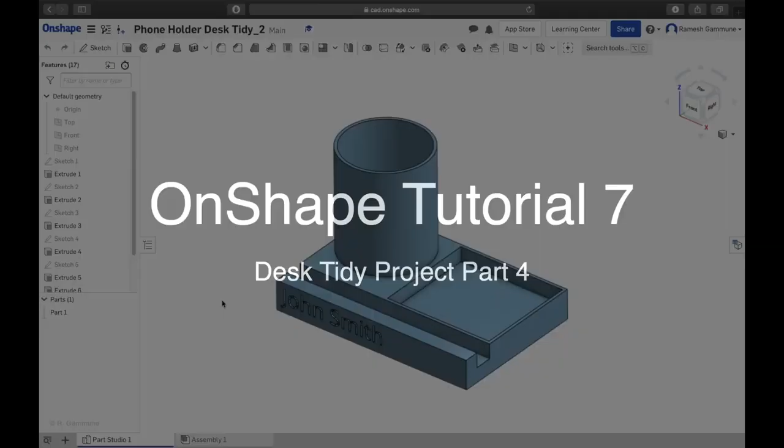Hey guys, welcome to the last video of our Introduction to Onshape tutorial series and the last video of the desk tidy as well. Today we are going to export this into an engineering drawing like so, right? Hopefully by the time we've done this, you'd be able to then print this off at home and eventually submit one of these in the class forum for me to have a look and make sure you've done all the work. All right, let's get cracking.

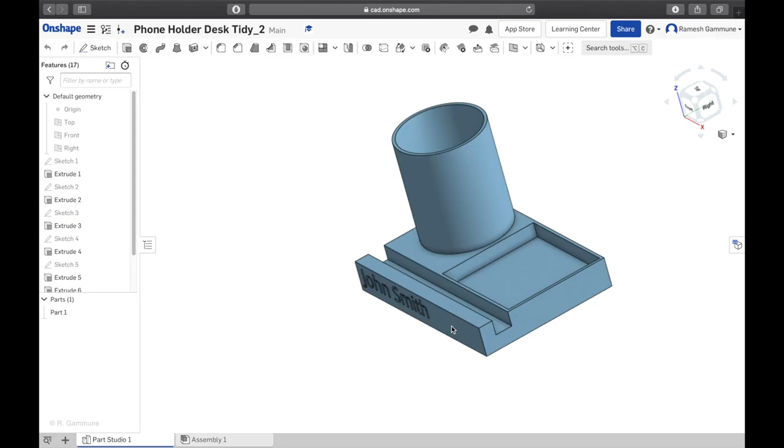So we've finished the phone holder / tidy thing. You got your name here, and yeah, that's it. So good job. And if you've done it correctly, you should have 7 extrude functions and 6 sketches that are all hidden as well. All right, and yeah, let's put this into a drawing.

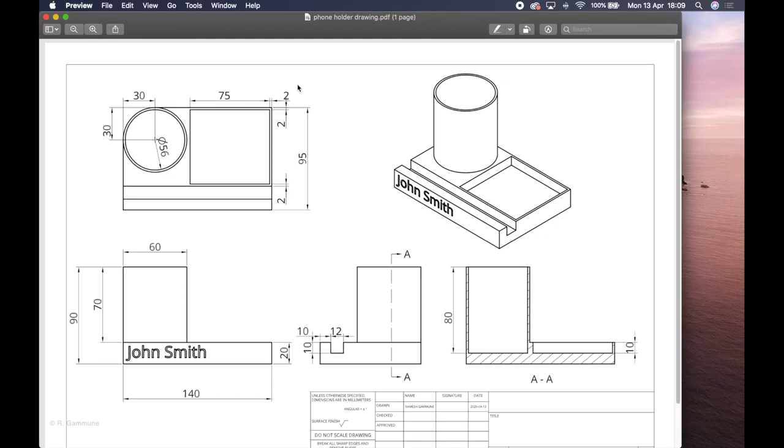Now, just looking at the engineering drawing, I've forgotten to fill this up, but we'll get that sorted as well. Essentially, what we're doing now is, this is called a third angle projection, right? So we've got our top, front, and our side views. These are the 3 main views. And then this is a section view showing you what this object would look like if we cut it down from here. And then I've gone ahead and put a 3D isometric view as well, just so you can show the actual object in 3D. Okay.

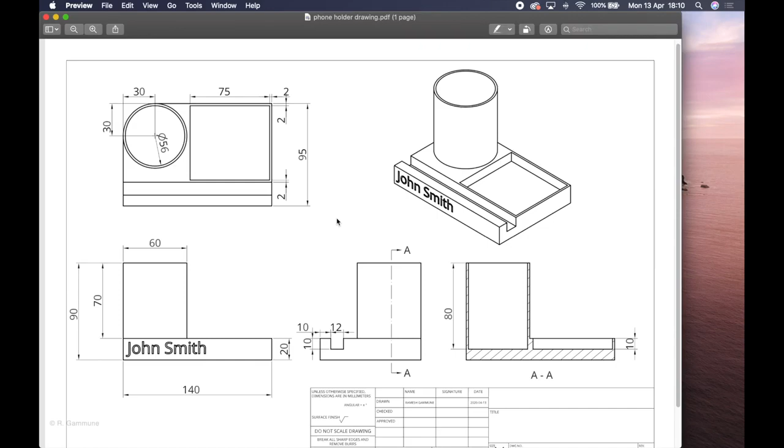And what I want you to pay attention to is how we dimension, like dimensioning conventions. We can see that the big overall dimensions are on the outside, and then the little ones go inside of it. Right. That's the only place we've had to do that here. Ultimately, the whole idea of an engineering drawing is you should be able to give this to someone and they should be able to make this on a CAD program or by hand using timber or plastic or metal. All right, let's get on with it.

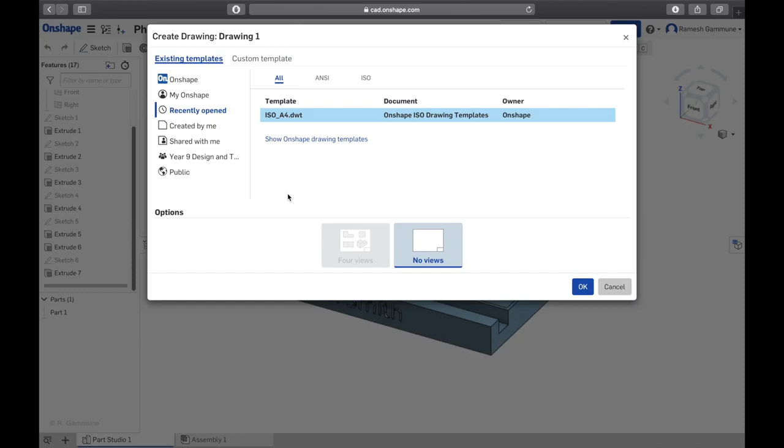Okay, so to do this, we need to open up a drawing, right? The best way to do this, well, the only way I've known so far on this software, is to go to this little plus icon on the bottom that says Insert New Element, click it, and click on Create Drawing. Right. Once you click that, it'll take you to this page. I'm going to show you how to make a custom template, right? So don't worry about these. Click on Custom Template up here.

We want to go third angle, right? English A4 is good because we can print it off at home. Units are in millimeters, decimal separated by a period. Border, you can just go include or do not include. I'm going to go do not include. Yep, and go ahead and click OK.

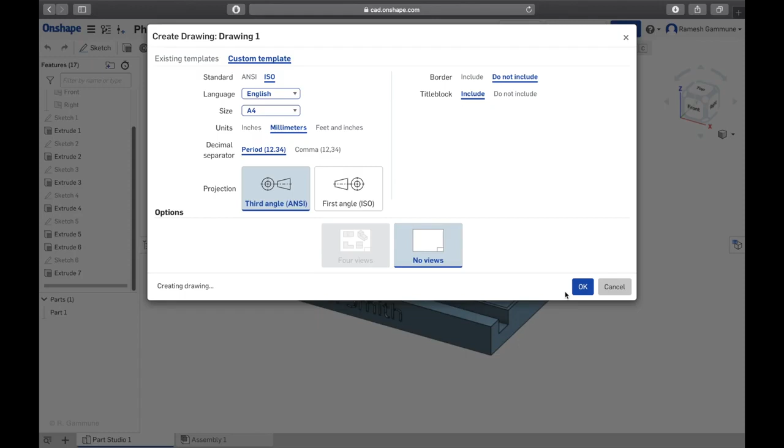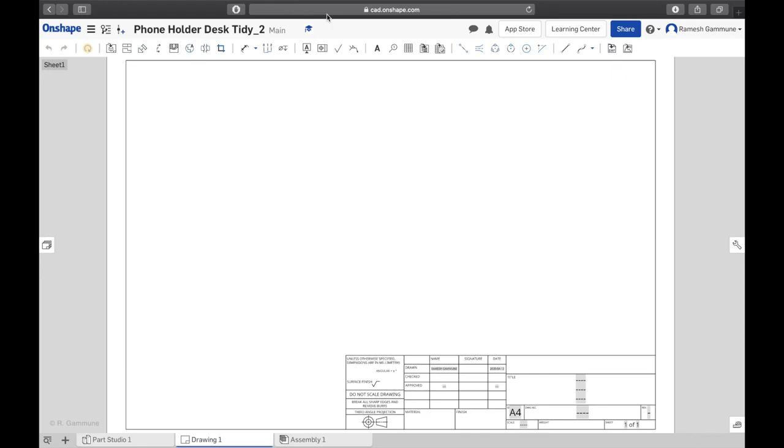Alright, so this is the drawing page. This is what opens up. First of all, I want you to get out of this select part or assembly box and hit this red cross over here as well. We'll talk about how to get into those menus. Right, so if you look at it, the navigation is pretty similar to the 3D space. By the way, if you need your 3D space, it's down here. Click on Part Studio, it'll take you here. Drawing is right next to it.

On the top, we've got our modifiers again. So this is to insert a view, that's the projected view, that's our section view, etc. Dimensioning, the very same, but when you dimension on the drawing, it doesn't actually change the model. It shows you the dimension of the actual model we built, right? We can add text, you can add a grid, tables, whatever. Okay, and I'll show you how to do that.

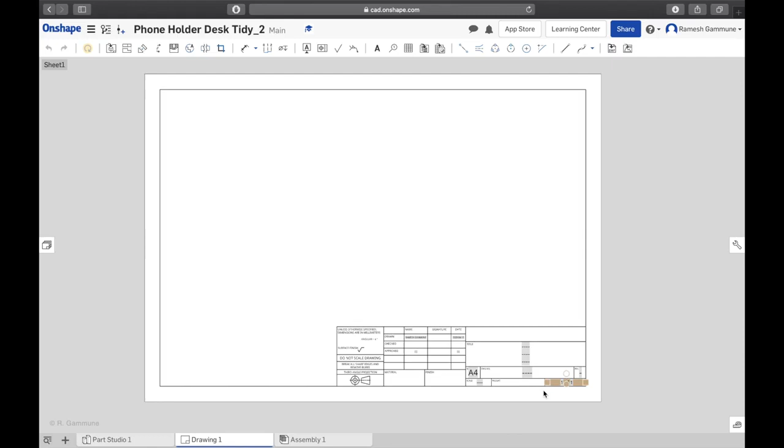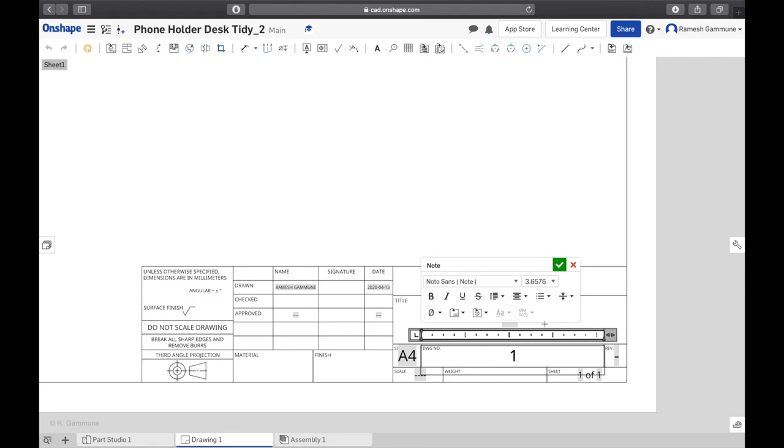Before we do anything, I like to start off by just putting a title here. So get on that, click it, delete that, double click, backspace, and that's drawing number 1 because we only have one drawing. Click the tick, double click that, and we can name this phone holder desk tidy. Okay, it's a long name, but it fits.

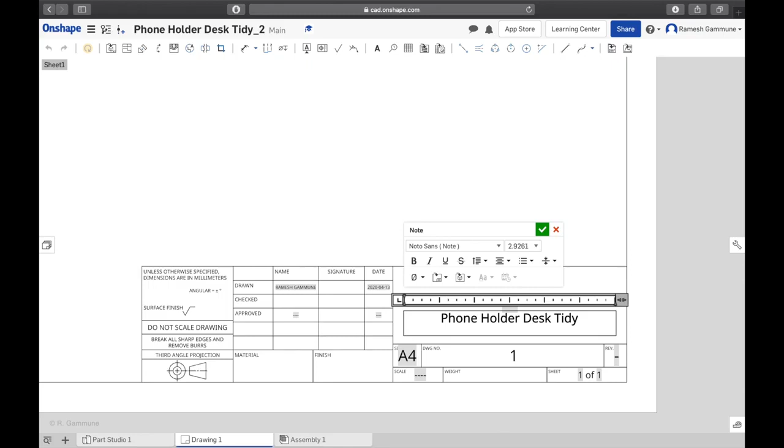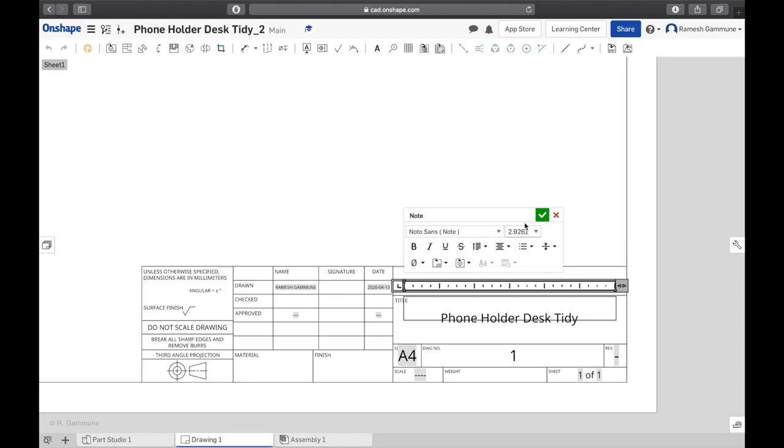And then this one over here, we don't want that showing like that. Let me get rid of that as well. Okay, there you go. Your title block is mostly done. We can fill that up if you want to, but I'm not too fussed about it right now.

All right, so let's insert our model here. For that, we need to go to Insert View, click that. Now, the first thing you need to do is pick the scale. We want this to be half the size so it fits on this page, so we're going 1 to 2. If we go 1 to 1, that is actual size. 1 to 2 is half the size. 1 to 3 is a third. You get what I mean.

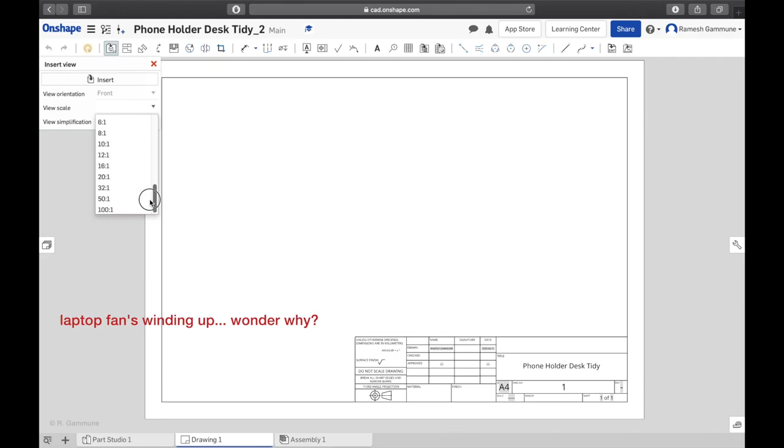If you're doing something really small, you can do 2 to 1, 3 to 1, essentially the opposite, okay? But we are going to use the 1 to 2 scale. Right, and click insert. That'll bring up this menu here. We need to go to Part Studio, Parts, because it is one part that we're doing. And click that.

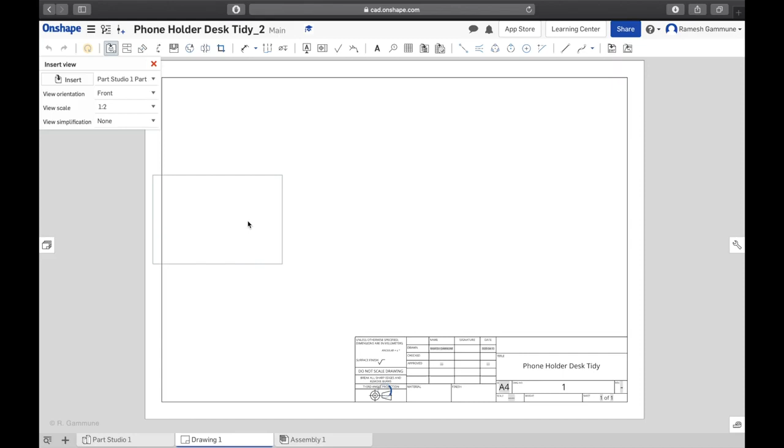Then we'll have this. Ooh, give it a second. It gets a bit slow in the drawings. I haven't figured out why yet. We have this drawing over here, just a front view. You'd notice that it is pretty laggy. Okay, so just bear with the software a bit.

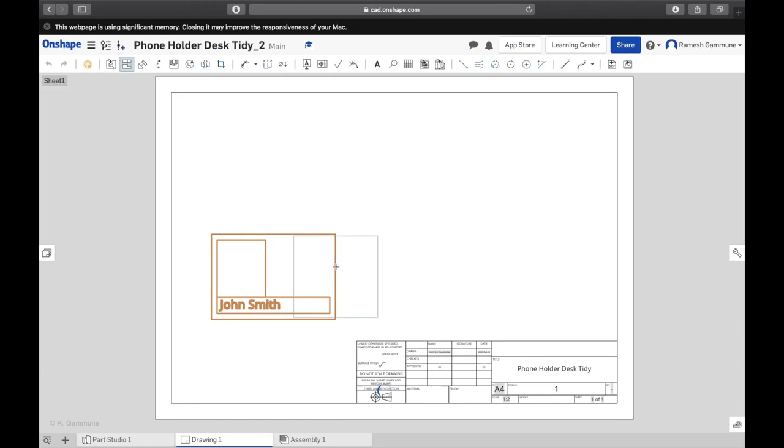Click that. Click and let go. And then you get this other view. Place either the side or the top, whichever one you prefer. I'm going to go with the top. And then it'll get out of that. And you notice that it automatically changes the function to projected view.

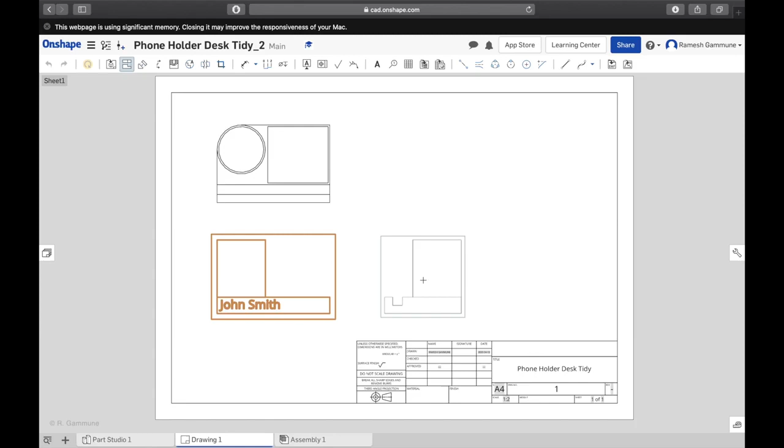Right, so what I'm going to do now is click on our front view, let go, and drag out the side view from there. Okay, then we hit escape. Now we're going to go ahead and dimension the main drawings first. Okay, follow what I do, and we'll try to keep it looking reasonably neat.

Right. What I like to do is get my main height and width on the front drawing and the depth on the top view. Okay, and you'll see what I mean. Just like in the 3D space, we're going to hit dimension. So click, make it about that long. Right, there you go. Next one.

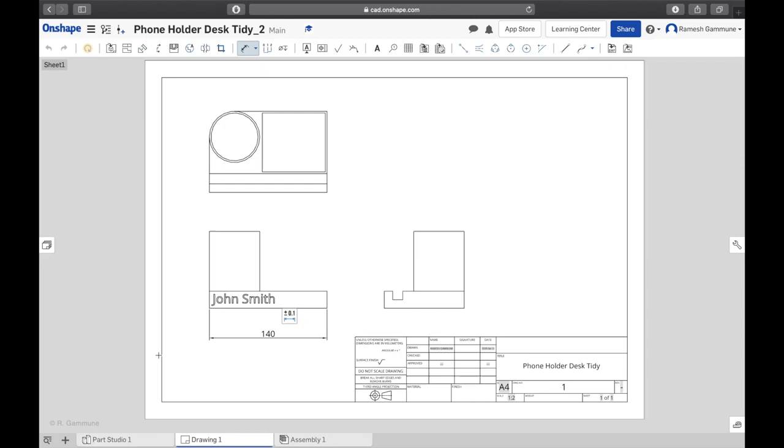You notice that if we try to just do this part, it's not giving you that whole length. We want the overall dimension. So I'm going to go from this top point to the bottom point, and that'll give us 90. Pull that out a fair bit because this inside dimension needs to go on the inside of that. 70, right? And we can give this side dimension here as well, 20.

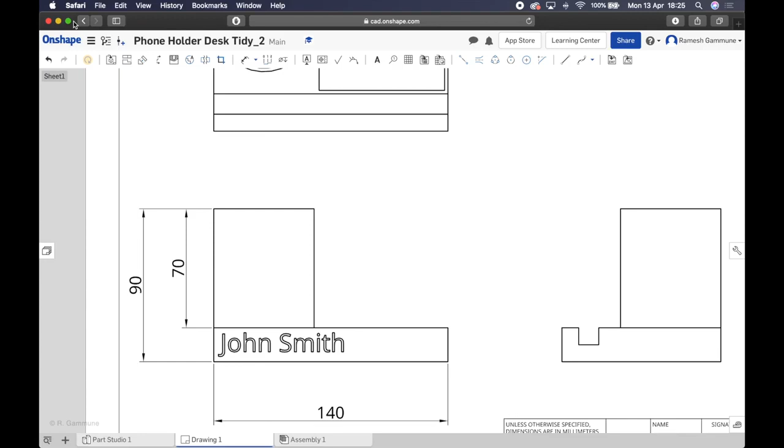Okay. Or you can have the side on this side. Actually, let's put it on that side. Click that again, and there we go. Just on that side. So that's that front view done. Okay, let's go ahead and move on to the top view. So I can just manipulate that like so.

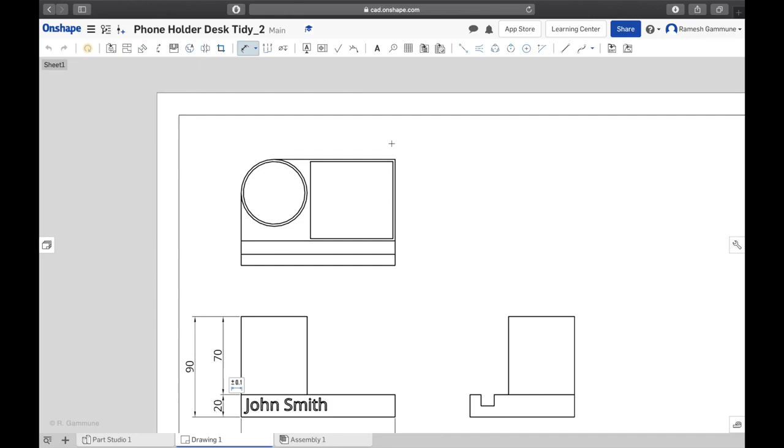We don't need to do the overall length anymore, but we do need to do the overall depth. So again, like I showed you before, it won't let us select this whole line, so we're going to go from point to point. That's a 95 mil thing. Give it a bit of space. And the next thing we want to do is define this inside box.

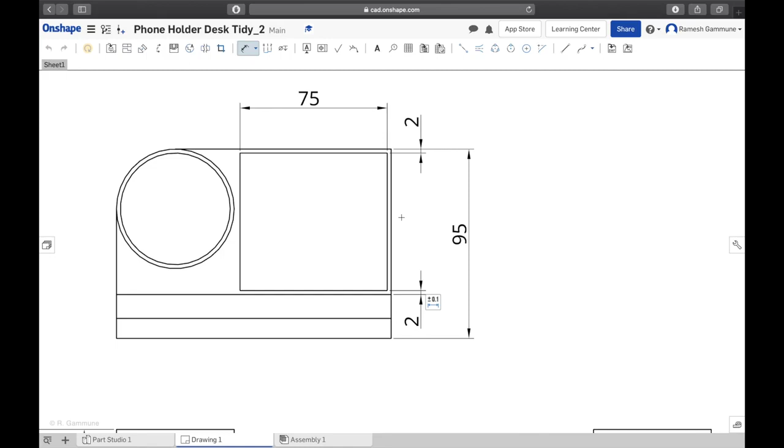75. Don't worry about this space here, because remember when we drew that box, we went with the offset amount of 2 mil. 2 mil here. And then we also did 2 mil here.

There you go. That's good enough for that part. Now the interesting part is with the circles. Now you notice that with the circles we can't really see the center point here. Okay, so we need to first of all put the center there so we can show them, or whoever's looking at this drawing, that the center point of that circle is 30 millimeters from each edge, right?

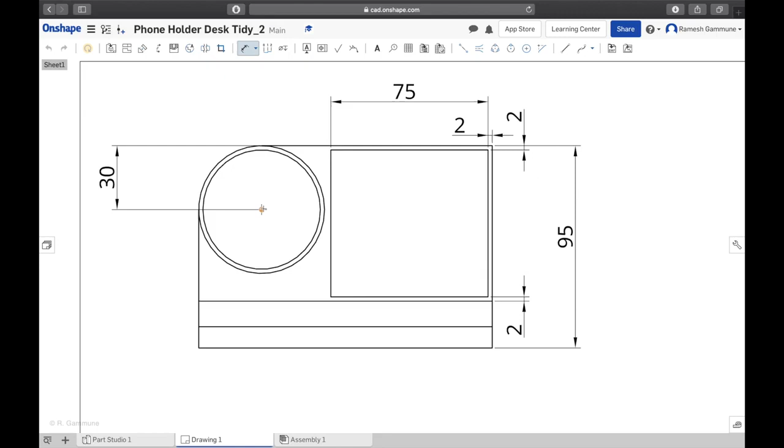So for that, I'm going to go up here to the center mark, click that, and then click either one of these circles, it doesn't really matter, and you'd see that that center point forms up there, right? So if you hit escape, there we go, stop. Right, and the next thing is to dimension this. So I'm going to dimension the center point to the ends first. It's 30 out that way. The center point to the end, and 30 up here as well.

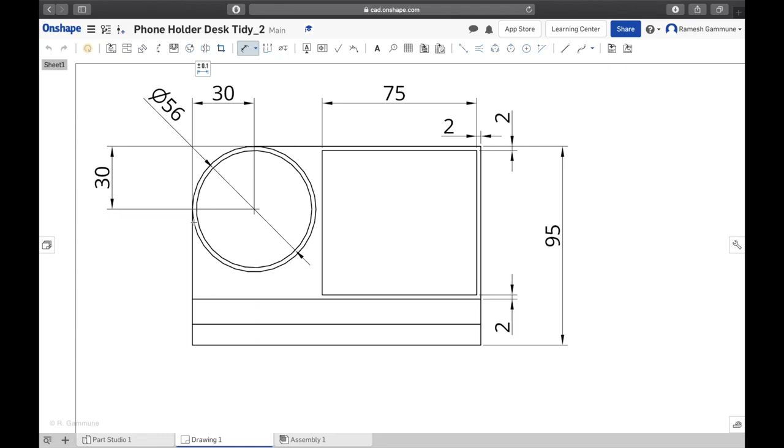Okay. And I'm only going to dimension the inner circle. I'll tell you why in a second. Okay, it's 56 millimeters there. Because if I try to do another dimension, it's going to be quite messy, right? So I am going to just put that outside diameter on the front view. Ooh, wrong, escape. There you go, 60. Right, that's that so far.

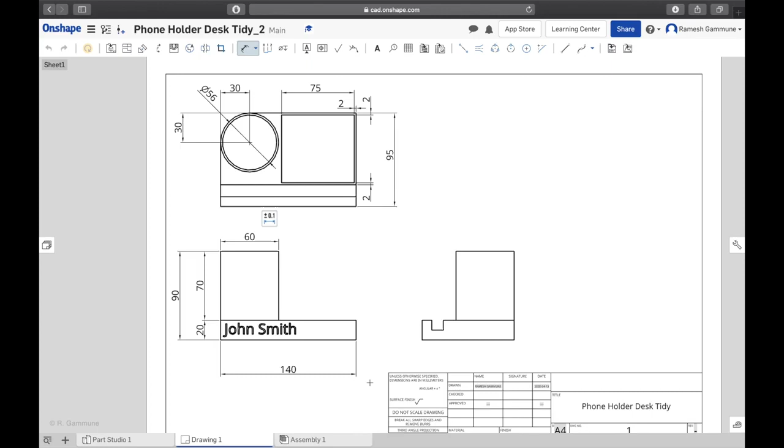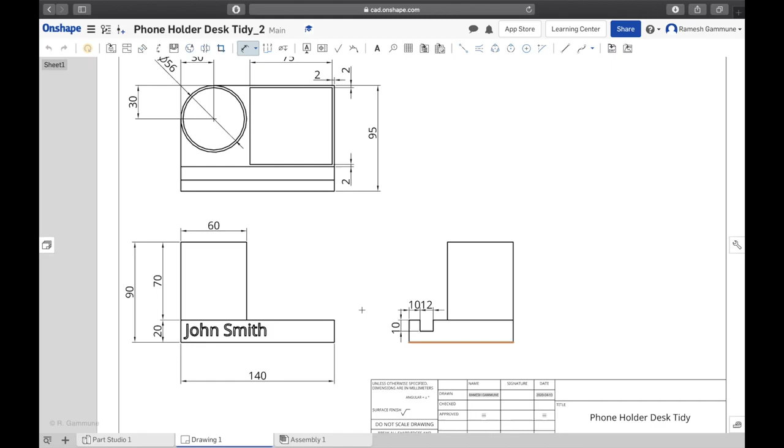Now we're going to move on to the side view. Okay, in the side view, we are just going to dimension our groove for the phone. Okay, first thing, right, that's 10 mil. That's 12. Then we need to know the depth. It's 10 as well. Right, so that's the side done. So that's most of our main dimensioning done, but we still need to show how deep the cuts are here.

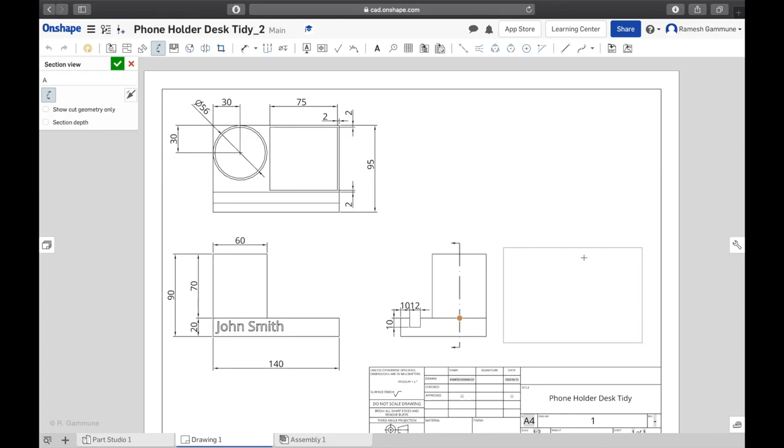And the only way to do that is by cutting this open and putting that view next to it over here. To do that, we go to the section view. We're cutting it this way, so we're going vertical, and place that line around the middle there. Right. And we want the drawing to be here. Go ahead and click it. And now we've got a section view here. Right, and you'll see it says A-A, which means we're looking at it from here to there, and that's our section view. I'm going to go ahead and dimension that.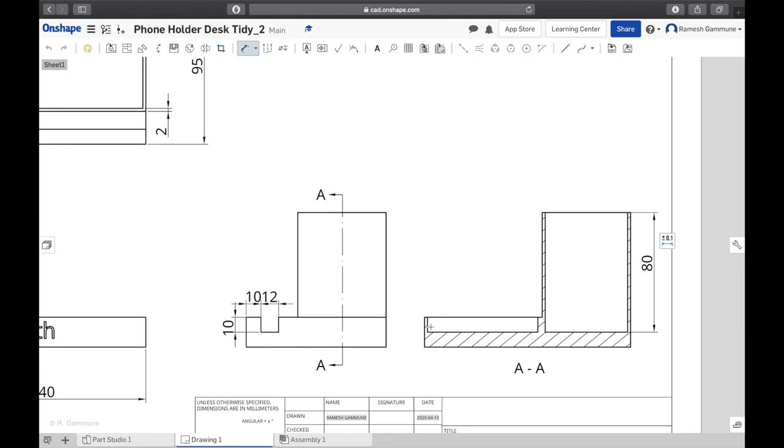So that depth is 80 mil. And that depth is 10. Right. Get out of the dimension tool. One last thing, if you want to do this, let's get this out into an isometric 3D view. Best way to do that is go back to projected view, click.

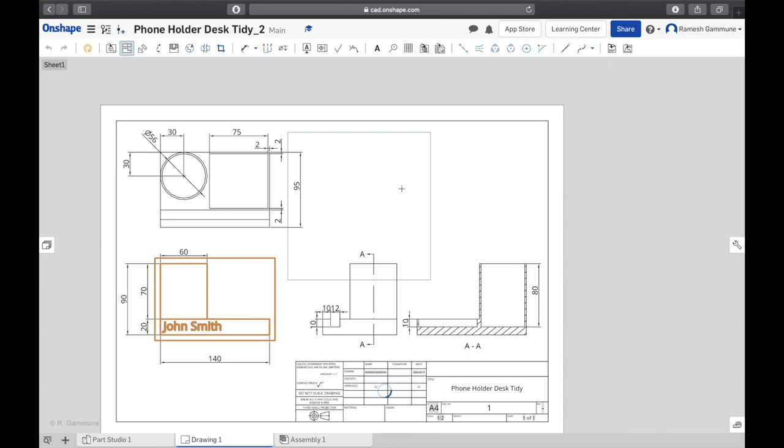Right, you see if we want to go up, if you go straight up, it's going to give us a top view. If you go to the left, it'll give us a left view. Right, it'll give us a right view. But if we go at an angle, if you go diagonally, you go a bit bigger, you click, there we go. It'll give you, and get out of the projected view by the way, it'll give you the 3D view. Alright guys, and that's it for drawings.

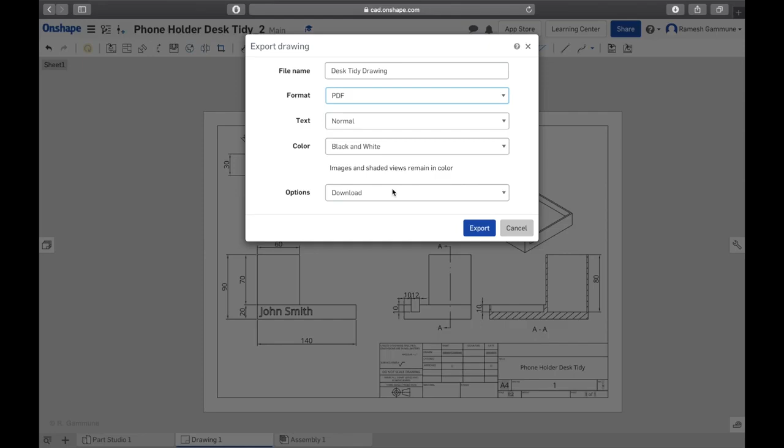Now to submit this, you can't submit this, you have to put in a PDF. So the way to do that is right click on drawing and click export, and file name, Desk Tidy drawing, format PDF, text normal black and white, and just hit option to download, and you get this message saying that it's been prepared for export. If you click on the bell, it'll tell you what's happening here. It's exporting the element.

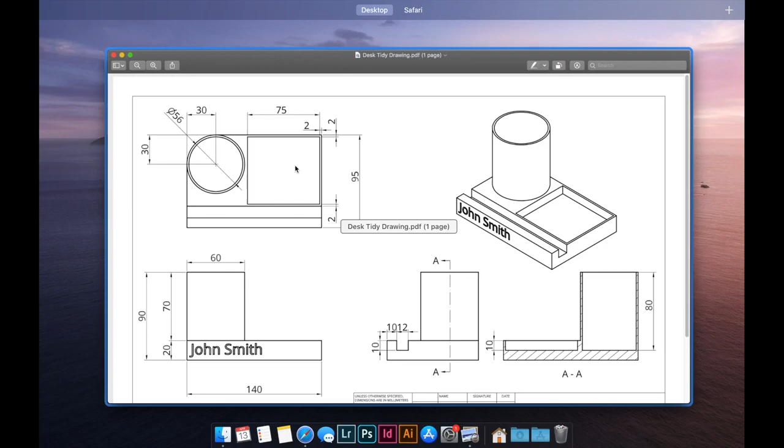Right, and when that's done, it'll send a message to you, and here it is. It's just opened up in my downloads folder. Make sure it's the correct one. Phone holder desk tidy, scale 1 to 2. Forgot to tell you that the scale will auto-populate once you pick the scale up there.